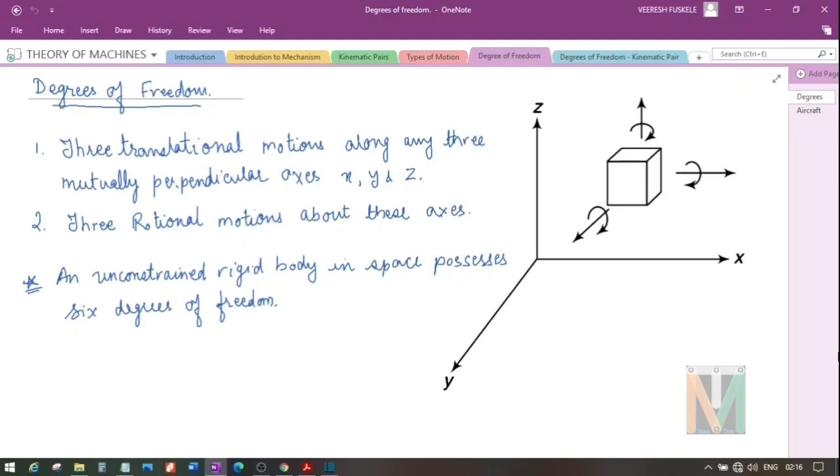Today we are going to continue our discussion on degrees of freedom. In the last lecture we saw the degrees of freedom of an unconstrained rigid body, and we discussed that an unconstrained rigid body in space can have 6 independent motions, out of which 3 are translation motions along 3 mutually perpendicular axes and 3 are rotational motions about these axes. And we define the degrees of freedom of an unconstrained rigid body in space as the number of independent motions that the body can have in space, right?

In today's lecture, we are going to discuss the degrees of freedom of a kinematic pair. As we have learned, a kinematic pair is a connection between 2 links having relative motion between each other, and this motion should be a constrained motion. Now, this connection of a link with another imposes certain restraints or constraints on their relative motion, and this number of restraints can never be 0 or 6.

If the number of restraints becomes 0, that means the joint is disconnected and it will no longer be a kinematic pair. Similarly, if the number of restraints becomes 6, that means the joint has become solid. So there will be no relative motion. So again, it will not be a kinematic pair, right?

Now let us understand this statement that the connection of a link with another imposes certain constraints on the relative motion by some demonstrations. So here you can see a kinematic pair with one link as a plate in blue color and another link as a cube placed on the plate in grey color. As you can see, the bottom surface of the cube is in contact with the plate, and thus this is forming a joint. And this joint is actually imposing some constraints or restraints on the motion of the cube relative to the plate.

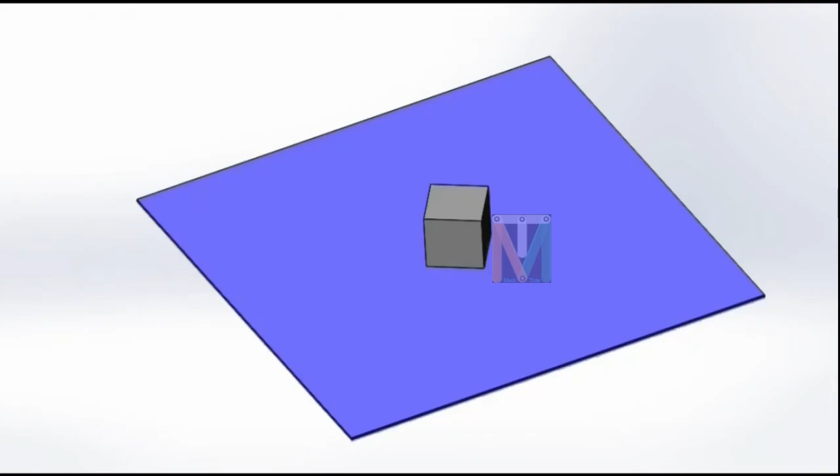As we have learned in the last lecture, an unconstrained body or a free body in space can have 6 independent motions, out of which 3 are the translatory motions in the x, y and z directions, and 3 are rotary motions about these axes. So let us see which motions are possible and which motions are restricted for this kinematic pair.

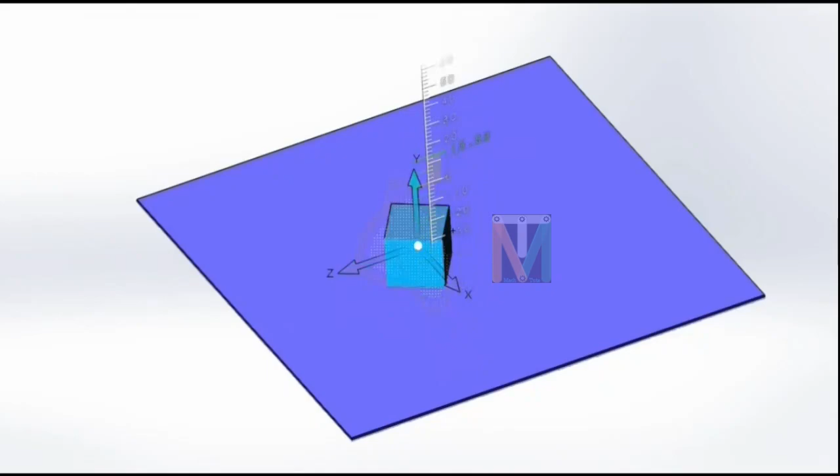If you see here, this cube can move in the x direction and also in the z direction, but there is no motion in the y direction, because if we lift the cube from the plate, then the connection will be broken and it will no longer be a kinematic pair. So the motion in y direction is restricted, right? Similarly, you can see that this cube cannot rotate about the x-axis. Similarly, it cannot rotate about the z-axis, but it is free to rotate about the y-axis, right?

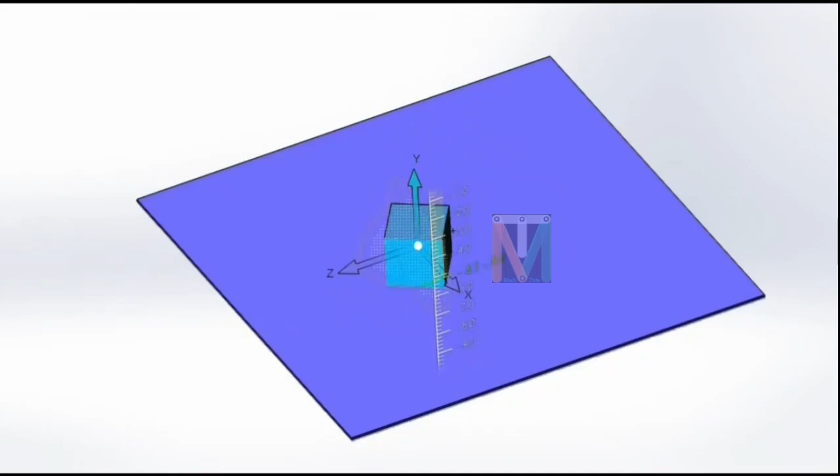So from this demonstration, we can see that one translatory motion is restricted and 2 rotational motions are restricted. So there are total 3 restrictions, or total 3 restraints for this kinematic pair. Having seen this demonstration, we can define the degrees of freedom of a kinematic pair as the number of independent relative motions, both translational and rotational, a pair can have.

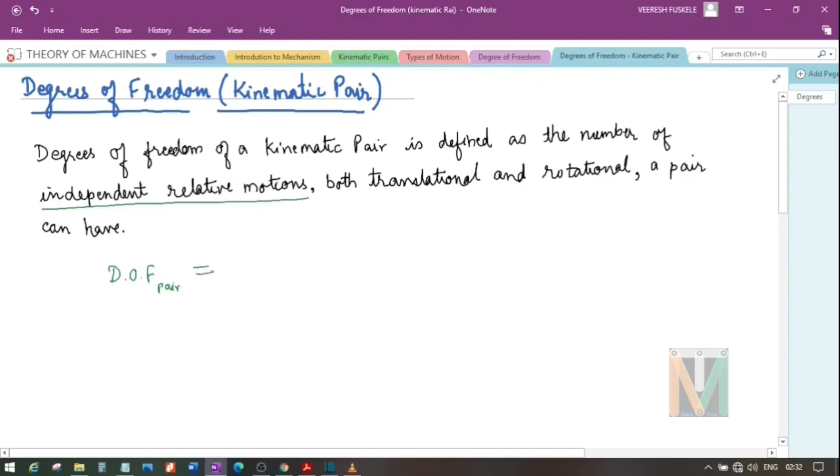Or mathematically, this can be written as degrees of freedom is equal to 6 minus number of restraints. 6 is the maximum number of motions that a free body can have, and the total number of restraints any connection is imposing on a kinematic pair will be subtracted from 6. That will give you the degrees of freedom of a kinematic pair. The number of restraints that a link imposes on another will depend upon the type of connection which exists between the 2 links.

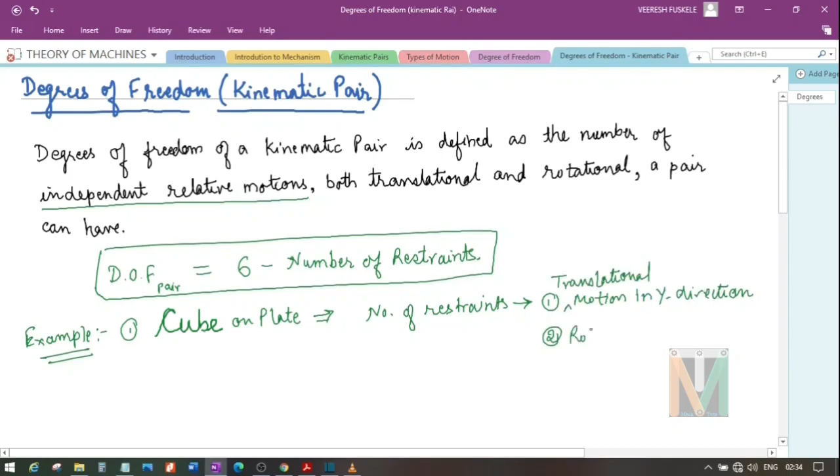So for the example which we just saw of a cube on a plate, what are the number of restraints that we saw for this kinematic pair? First, the translation motion in the y direction was restricted. Also, rotational motion about the x-axis was restricted, and similarly, rotational motion about the z-axis was also restricted. So there were 3 restraints for this pair.

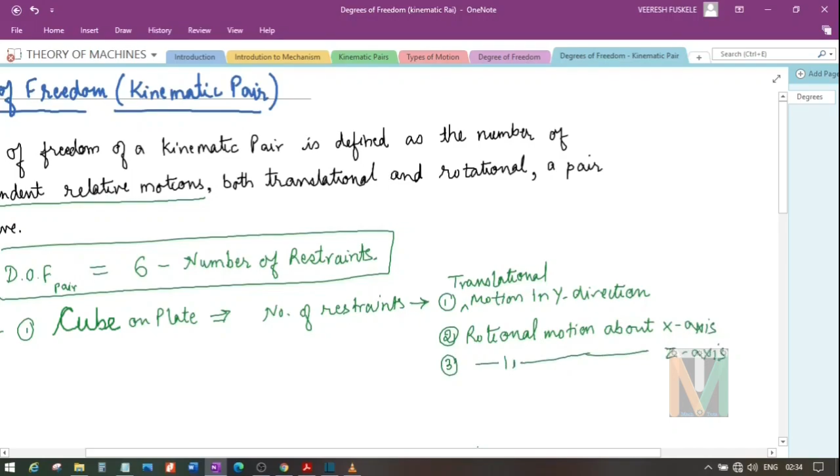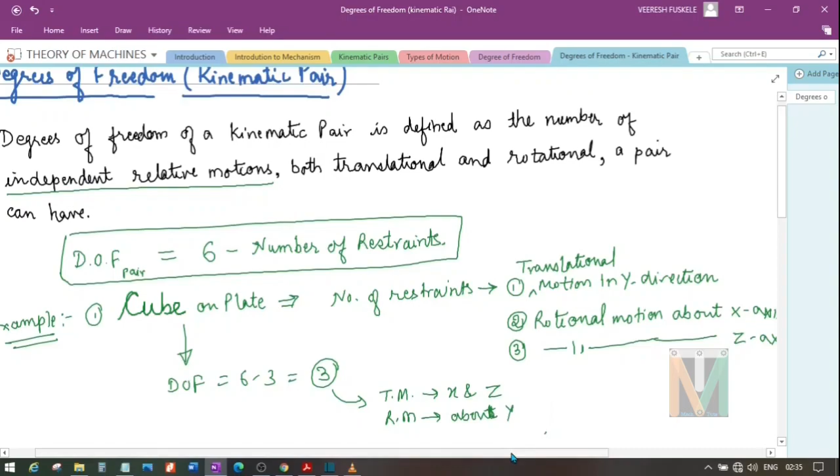So for this pair, the degrees of freedom would be 6 minus 3. That is equal to 3. So it will be having 3 independent motions: translation motion in x and z direction and rotational motion about y-axis. Right? So the degree of freedom is defined as the number of independent relative motions that the kinematic pair can have, or it can be formalized as degree of freedom is equal to 6 minus number of restraints.

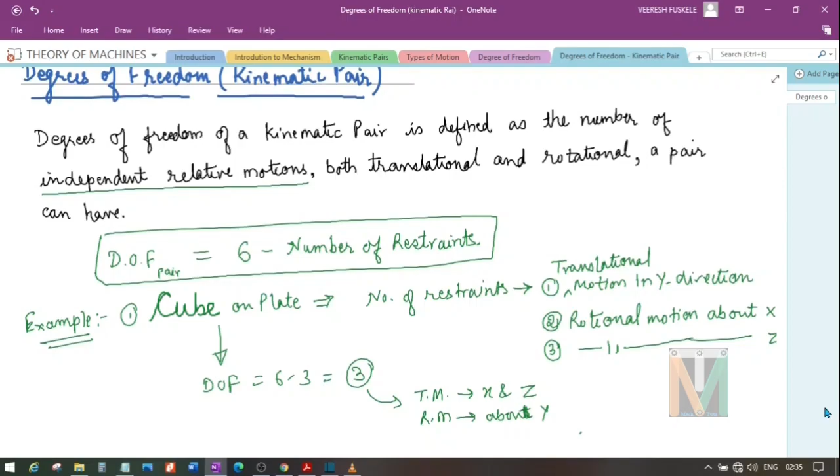Right? So let us now see some more examples where we can see how the type of joint is responsible for the number of restraints. So whatever independent relative motions a kinematic pair can have, that will be the degrees of freedom of that kinematic pair. So this is another kinematic pair in which a cylinder is placed over a plate. So there is a contact between the cylinder and the plate. So let us see which motions are possible and which will be restricted.

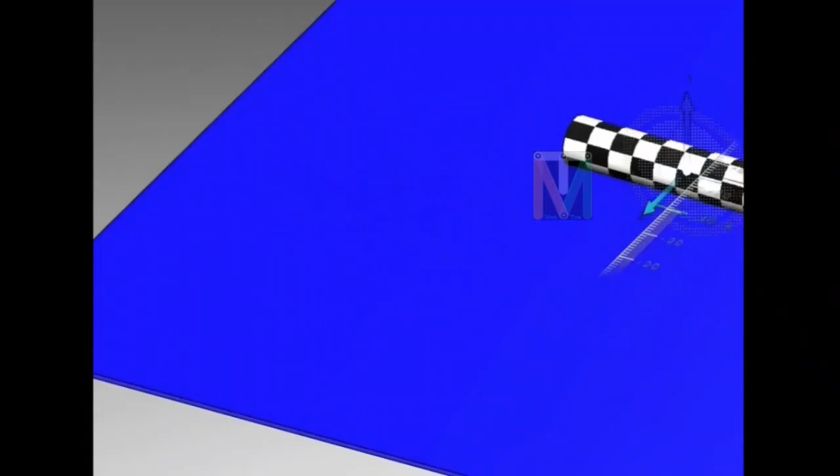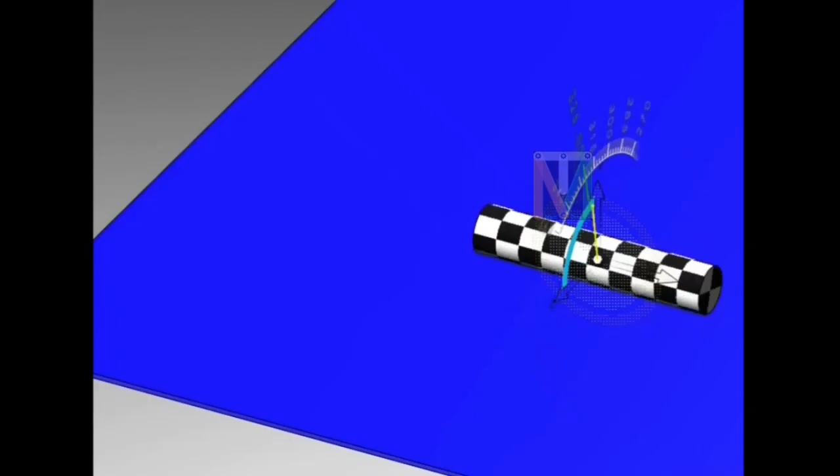So you can see that the cylinder can translate in the x direction. It can also translate in the z direction, but it cannot translate in the y direction, because if we try to lift the cylinder, then the connection will be broken and it will not be a kinematic pair anymore. Right? Similarly, you can see that cylinder can rotate about the x-axis, but there will be no rotation about the z-axis, and it is free to rotate about the y-axis.

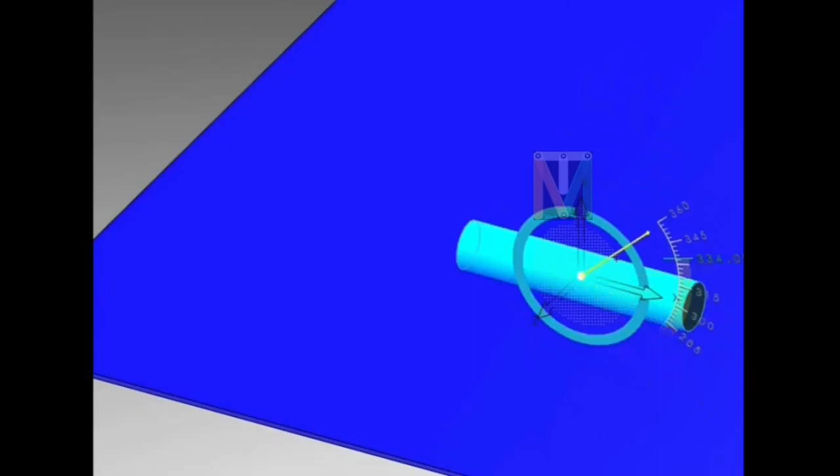Right? So what we observe for this kinematic pair, that one of the translatory motion is restricted and one rotational motion is restricted. So in total, the number of restraints will be 2. So for cylinder on plate kinematic pair, the degree of freedom would be 6 minus 1 translation motion and minus 1 rotational motion. So these will be 2 restraints. So the degree of freedom would be 4.

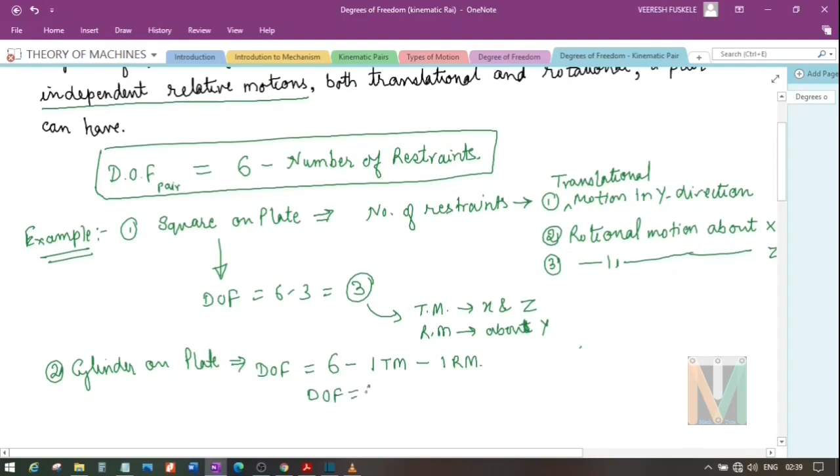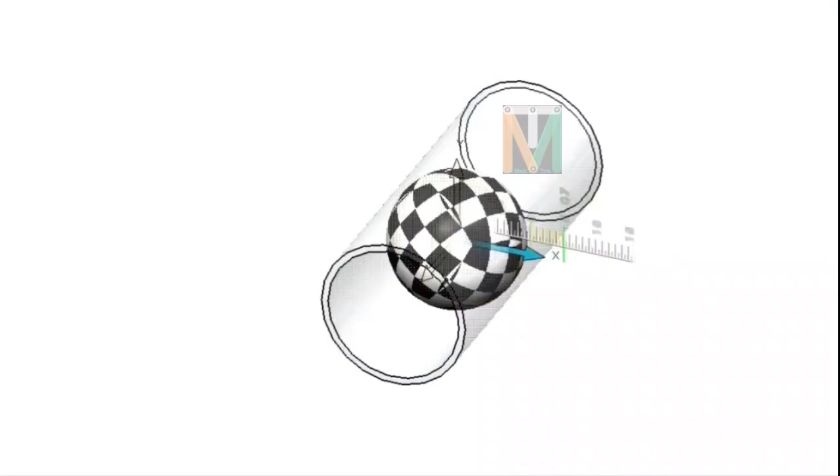Right? Let us see one more example where the degree of freedom will be 4 and the number of restraints will be 2. So this is an example in which a sphere is placed inside a hollow cylinder, and so in this kinematic pair we can see that there will be no translatory motion along the x-axis because of the wall of the cylinder, but there will be motion in the z direction, that is along the axis of the cylinder, and there will be no translatory motion along the y-axis because of the wall of the cylinder.

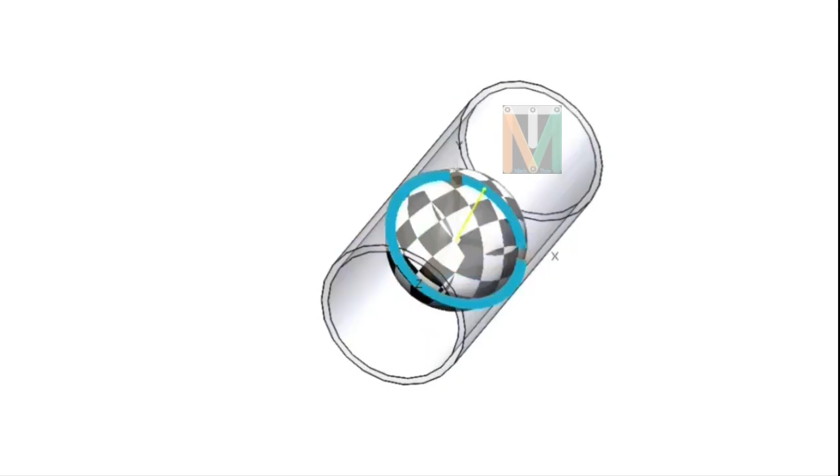Also you can see that the sphere will be free to rotate about all the 3 axes. It is free to rotate about the x-axis, it can rotate about the y-axis, and it can also rotate about the z-axis. So we can see from this demonstration that there are 2 translation motions that are restricted. So for example of sphere inside a hollow cylinder, we have a degree of freedom as 6 minus 2 translatory motions which are restricted. So the degree of freedom will be 4.

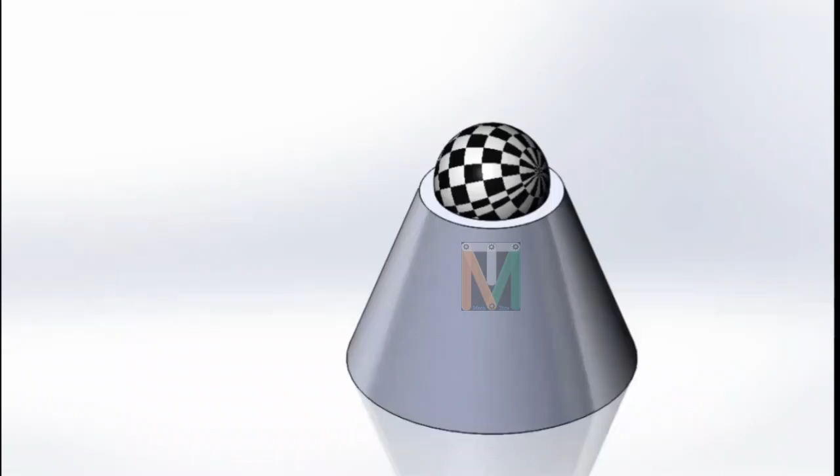Right? Now let us see another example where there will be 3 restraints as we saw in the first example, and the degree of freedom will also be 3. So this is a spherical joint in which you can see that a solid sphere is placed inside the cavity of a cone, right? And you can see that there can be no translatory motion in either of the directions. There can be no translation motion in the x direction, there can be no translatory motion in the y, and also there can be no translatory motion in the z direction, right?

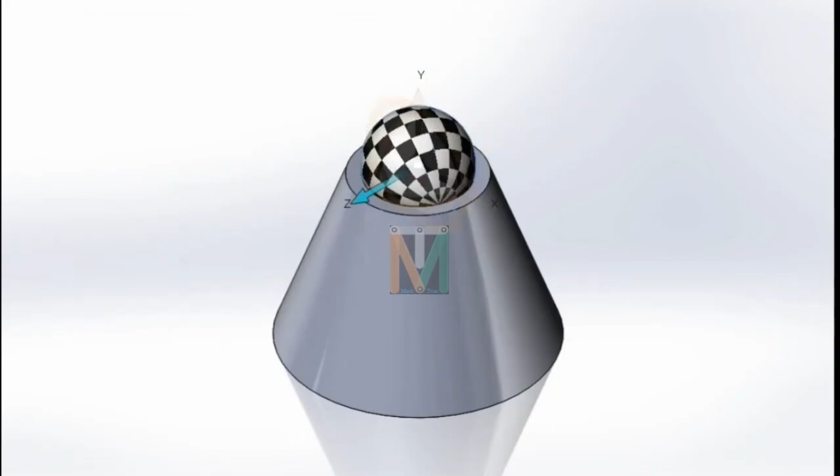But as you can see here, the sphere is free to rotate about the x-axis as well as about the y-axis and also about the z-axis, right? So in this demonstration, we can see that there are 3 restraints, and all the 3 restraints are for the translation motions. So the degree of freedom for the spherical pair, which we have already studied when we studied about the classification of the kinematic pair. So for this, the degree of freedom would be 6 minus 3 translation motion. So it will be equal to 3, right?

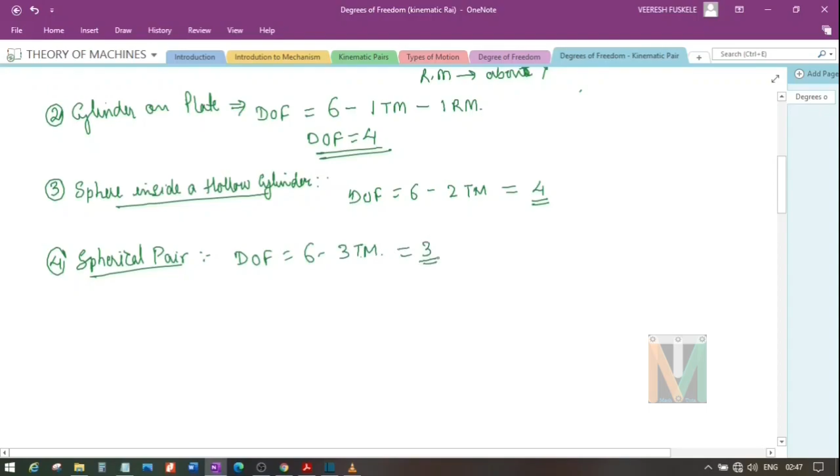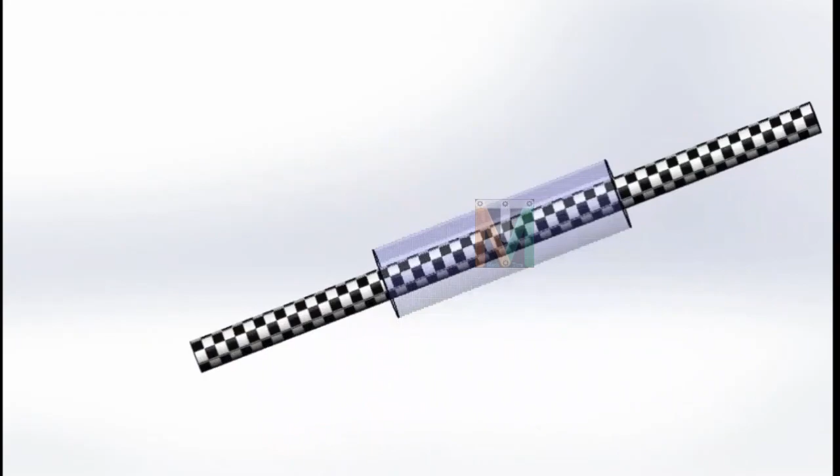Now let us see another example in which the number of restraints would be 4 and the degree of freedom will be 2. So as you see in this figure, there is a kinematic pair in which one of the links is a cylindrical bar or a shaft which is placed inside a hollow cylinder. And notice one thing, that there are no collars or bearings here.

So as we see here, the shaft will not have any translatory motion along the x-axis, and it will also not have any translatory motion along the y-axis, and this is because of the walls of the hollow cylinder. But it will be free to translate along the z-axis, that is along the axis of the hollow cylinder, right? So two of the translatory motions are restricted and one translatory motion is possible.

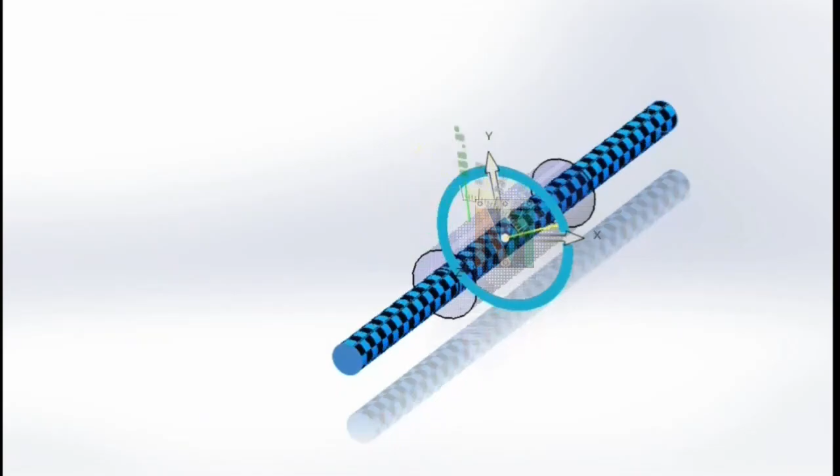Also, as we can see here, this shaft will not have any rotary motion about the x-axis, and also it will not have rotary motion about the y-axis because of the walls of the cylinder, but it will be free to rotate about the z-axis, that is the axis of the cylinder, right? So two rotational motions will also be restricted. So here the total number of restraints would be 4: 2 translatory motions and 2 rotational motions will be restricted, right?

So the degree of freedom for this pair, for a cylinder inside a hollow cylinder, would be equal to 6 minus 2 translatory motions and minus 2 rotational motions. So the degree of freedom would be 2. So in this pair, the shaft will be free to rotate. Also, it will be free to translate along the axis of the hollow cylinder, right? So these are the two independent motions that are possible.

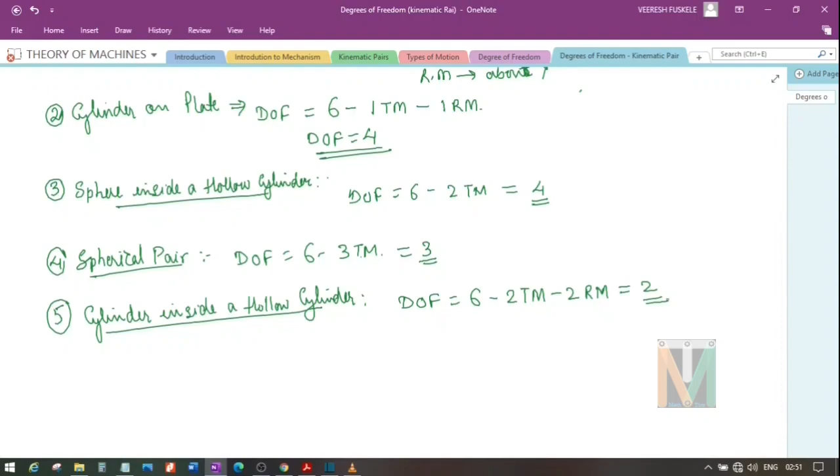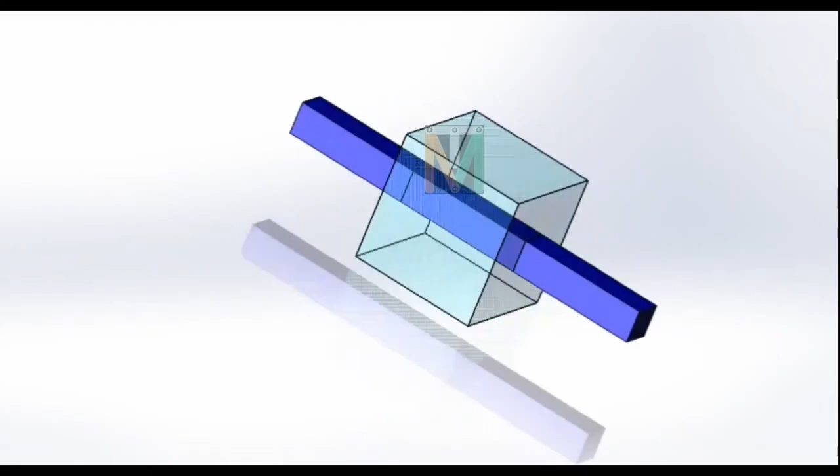Now let us move to another example where there will be 5 restraints and the degree of freedom would be 1. So you can see here there is a square bar which is placed inside a square hole in a cube. So this is a prismatic pair. As this is a square bar placed inside a square hole, no rotational motion will be possible. This we can see just by observation, and it will only be able to slide along the axis of the square hole, right?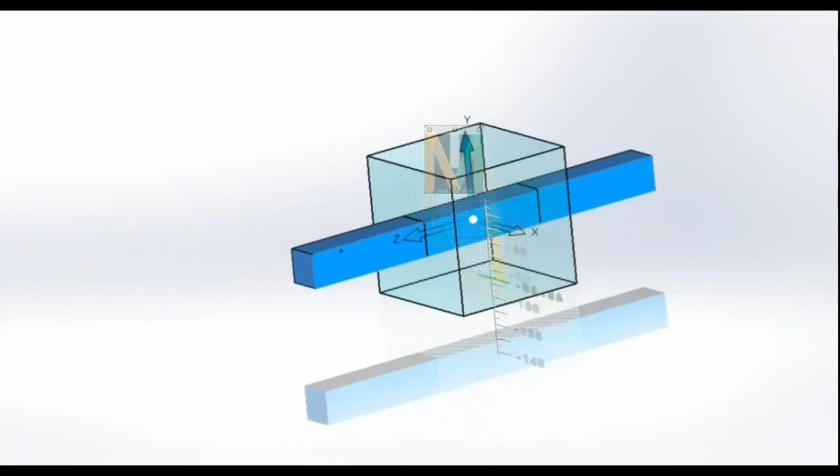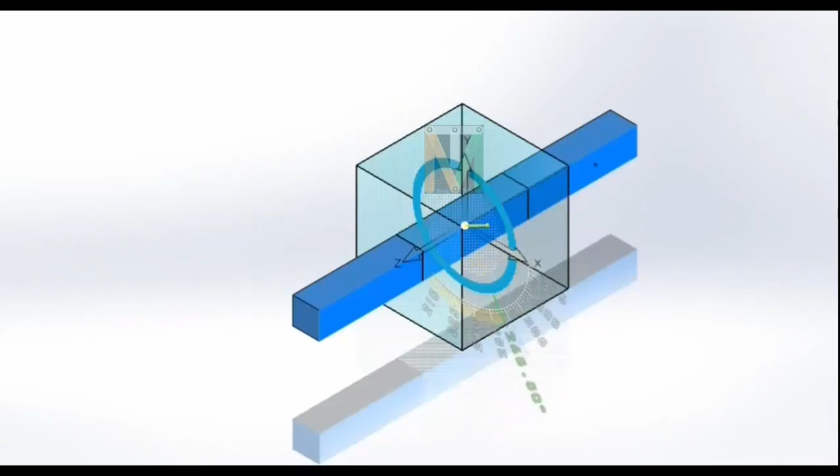So we can see here that this square bar will not have any translatory motion along the x-axis. Also, it will not have any translatory motion along the y-axis because of the walls of the cube, but it will only be free to slide along the z-axis, that is the axis of the hole. So this is the only translatory motion that is possible, and the other 2 translatory motions are restricted. Also, it is shown here that there will be no rotational motion about any of the 3 axes, right? So all the rotational motions will be restricted and 2 of the translatory motions will be restricted. So the total number of restraints is 5, right?

So the degree of freedom for a square bar in a square hole, that is a prismatic pair, would be 6 minus 2 translational motions and minus 3 rotational motions. So the degree of freedom would be 1, right?

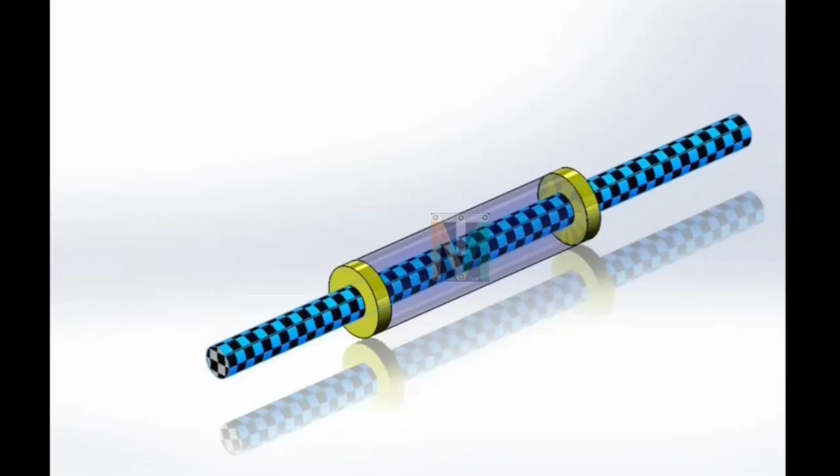Let us now see another example which we also discussed during the classification of the kinematic pairs. It is a cylindrical shaft which is placed inside a hollow cylinder but with collars or bearings at both the ends, right? So due to the collars, the sliding motion of the shaft will be restricted along the axis of the hollow cylinder. So as we can see, there will be no translatory motion in the x direction and no translatory motion in the y direction. This is due to the walls of the cylinder, and there will also be no translatory motion along the axis of the hollow cylinder due to the collars, right?

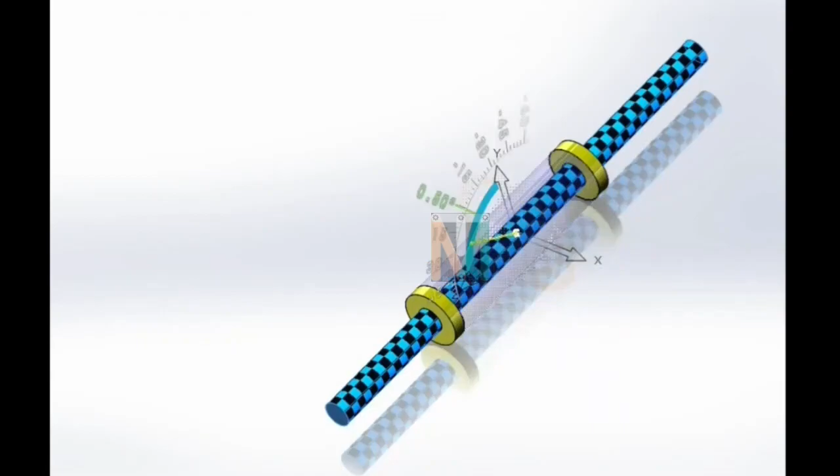We can also see that due to the walls of the cylinder, the rotational motion about the x-axis and about the y-axis will be restricted. So this shaft will only have rotational motion about the z-axis, that is the axis of the hollow cylinder, right?

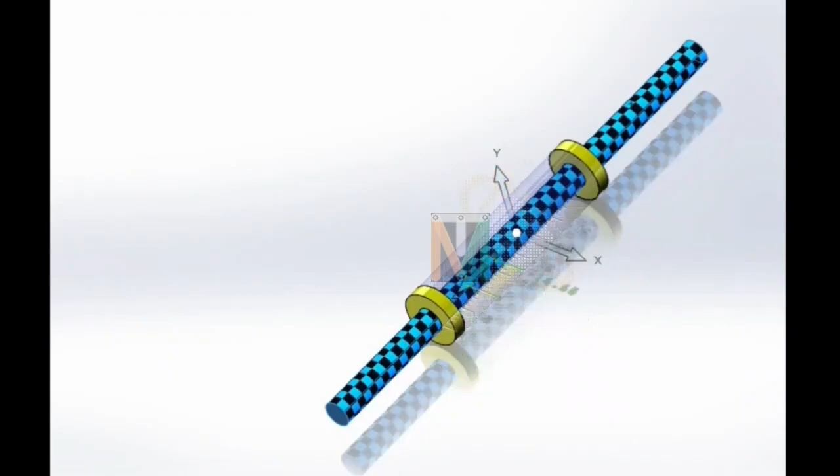So in total, 5 restraints will be there: 3 translation motions will be restricted and 2 rotational motions are restricted, right? So the degree of freedom for a cylinder inside a hollow cylinder with collars would be 6 minus 3 translation motions restricted and minus 2 rotational motions restricted. So the degree of freedom would be 1, right? That is, only the rotary motion about the axis of the hollow cylinder will be possible, right?

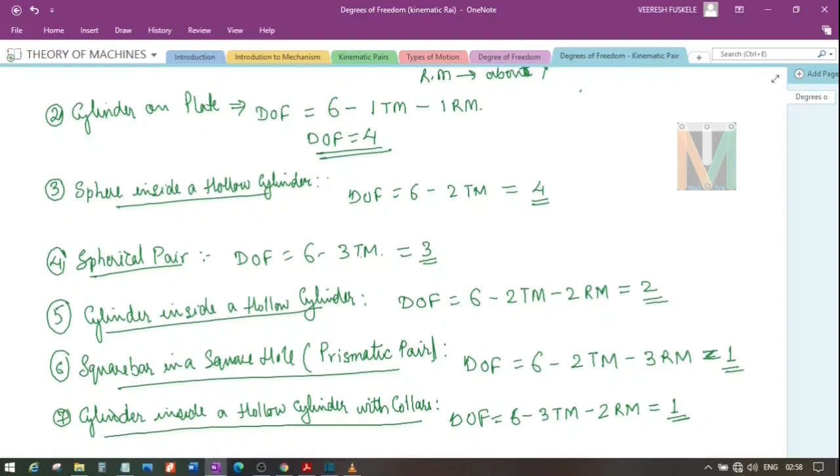Now let us see one example in which the degree of freedom would be 5 and the number of restraints would be 1, right? So here you see a kinematic pair in which a solid sphere is placed over a plate and there is a contact between the two, right? So as per our previous discussion, we can't lift the sphere because if we do so, then the contact will be broken and it will no longer be a kinematic pair, right?

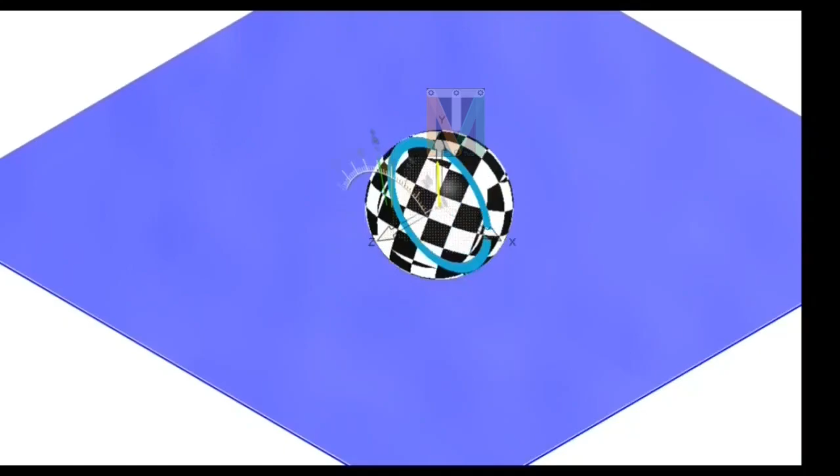So as shown here, the sphere would be free to translate about the x-axis and also about the z-axis, but there will be no translation motion about the y-axis or in the vertical direction, right? So one of the translatory motions is restricted, and also as you can see here, the sphere would be free to rotate about all the three axes. That is, it is free to rotate about the x-axis, the y-axis and also the z-axis, right? So all the three rotational motions are possible.

So we see here from the demonstration that there will be a total of one restraint imposed by this joint, right? That is, the vertical motion of the sphere is restricted. So for a sphere on plate kinematic pair, the degree of freedom would be 6 minus 1, since one translatory motion, the motion in the y direction, is restricted. So the degree of freedom would be 5, right?

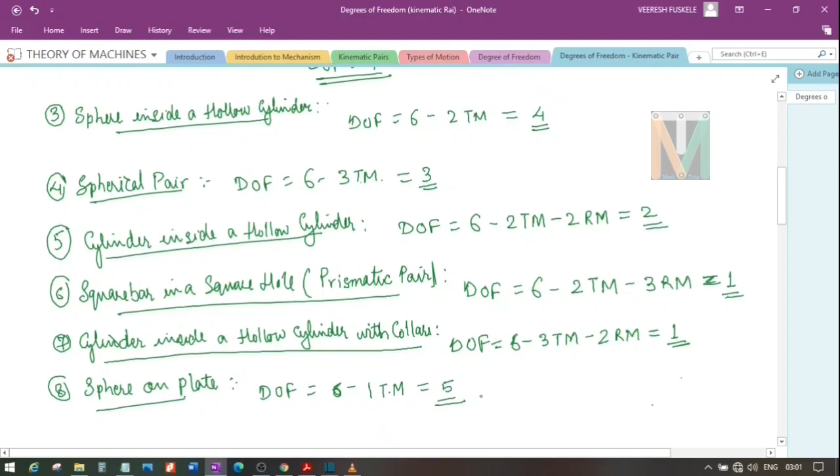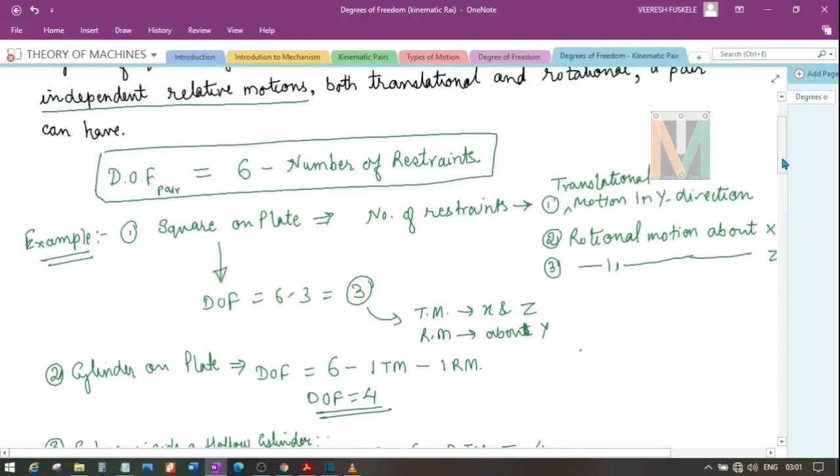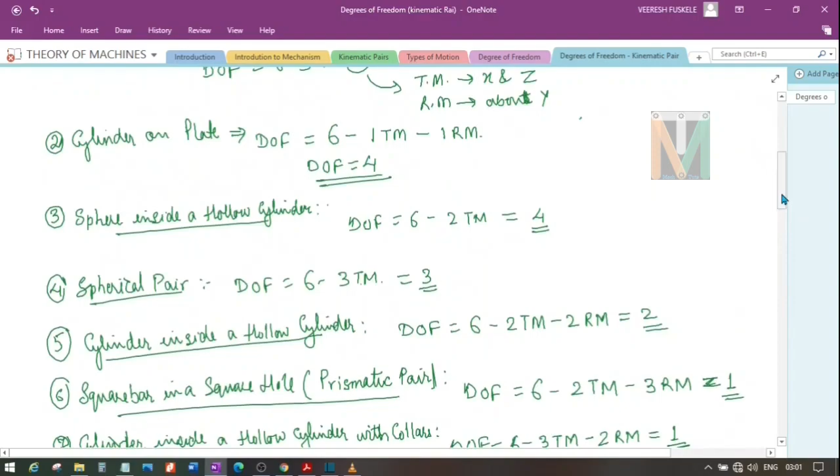So we have seen a lot of examples with various numbers of degrees of freedom. We started with the degrees of freedom of 6, which we saw in the last lecture. And today we saw the example of degree of freedom of 5, that is the sphere on a plate. Then we saw the examples of degrees of freedom of 4, that is the cylinder on plate and the sphere inside a hollow cylinder. We also saw the examples where the degree of freedom is 3, the spherical pair and a cube on a plate.

We also saw the example where the degree of freedom is 2, a cylinder inside a hollow cylinder, right? And we also have seen the examples where the degree of freedom is 1. That is the prismatic pair, a square bar placed inside the square hole in a cube, and also the cylinder inside a hollow cylinder with collar, right? These are just a few of the demonstrations, but there can be many more examples which you can observe in day-to-day life. We just saw a few examples to make you understand the concept of degrees of freedom of a kinematic pair, right?

So the degree of freedom of a kinematic pair will be the total number of independent relative motions, both translational and rotational, that a pair can have, right? And it is formulated as: the degree of freedom of a kinematic pair is equal to 6 minus the number of restraints, right? And this is how, depending on the type of joint between the two links of the kinematic pair, the number of restraints and the degree of freedom is decided, or the number of independent relative motions that the kinematic pair can have can be known, right? So I hope you have understood the concept of degrees of freedom of a kinematic pair.